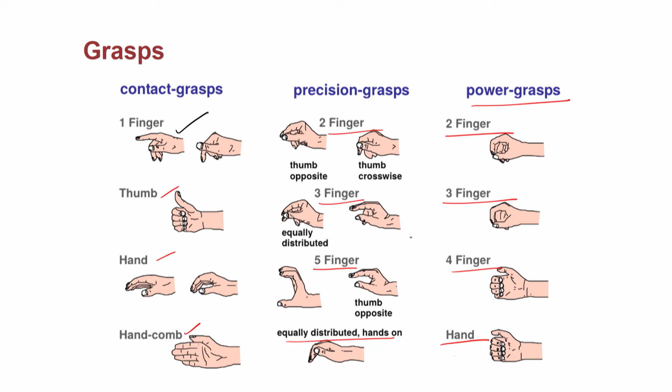Now, how are we going to enable this in machine haptics is what we are going to see. It is a very complex task, and the research started about 1960s. It is a very 60 year old topic. How the research evolved is also what we are going to see in machine haptics.

The same thing we can convert into machine haptics, where the motions—suppose the human finger is attached to the end effector of a robotic device—this robotic device movement can be sensed by movement sensors, giving position information to the computer. The computer can generate torque, and then actuators can apply force to the end effector, which will resist the movement of the user. That is how we can feel the forces.

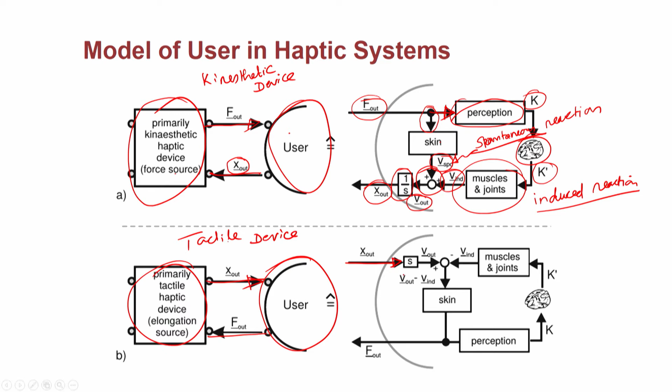So in this case, how are we going to model the user? Again, the position output is coming from the tactile device, and this is converted into V out, velocity out, using differentiation, and that is sensed by the skin, and the user is perceiving.

The user has a perception of the tactile device, and this perception is converted into a reaction, again an induced, voluntary reaction, which moves the fingertip. That fingertip movement is summed up, and the resultant velocity is given to the skin, which the user actually perceives. This perception is again part of the whole cycle.

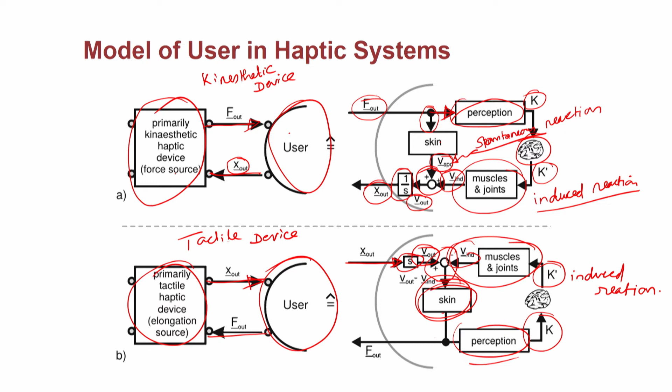So that is a tactile device, a model of user. What we will be focusing on is only the kinesthetic device.

Now this model of the user, we can consider that all those abstracts can be converted into a transfer function looking from the system's point of view. We can make it a transfer function of each of the small blocks, and if we can find these transfer functions, we can have much better control of the devices. That is one of the important stages of machine haptics that is also involved in human haptics.

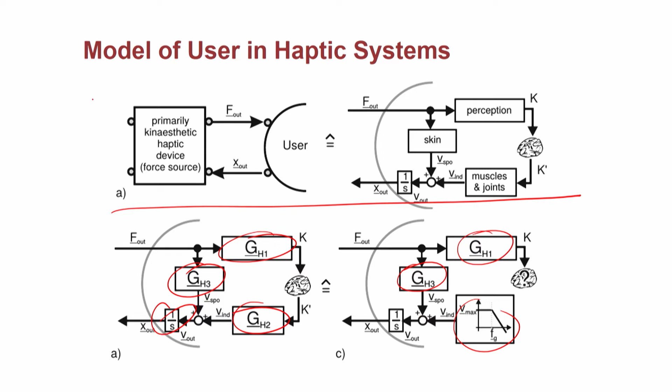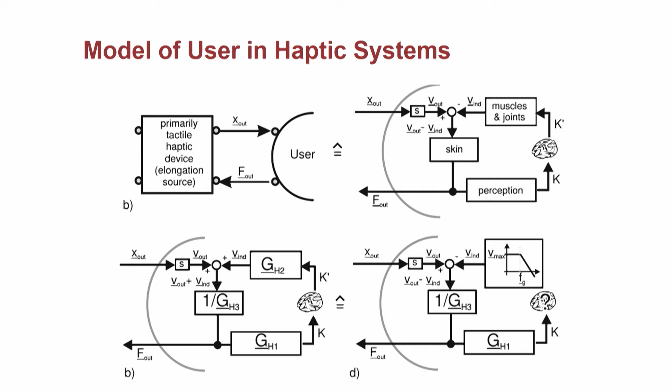How are we going to evaluate each of these transfer functions? That is still an active research area, and people are still struggling to find out how to determine the transfer functions of each of the blocks. This is for the kinesthetic system, and the next slide is for tactile systems. We will see details in coming classes, but I hope you see how we are approaching machine haptics.

Now we have an idea about how we want to go about it, but one of the major important challenges in machine haptics is the actuator. Any mechanical device will have its own intrinsic properties, it will have friction, mass, compliance, viscosity. But what we are looking for is a device, an actuator without friction, without mass, one which can deliver a very high range of compliances or very low amounts of viscosity. These are all ideal conditions, and only with ideal conditions can we design a better haptic device.

Visual interfaces exploit the limitations of the visual apparatus. You are watching this display flickering at 30 hertz. Those watching the video, it may be flickering at 60 hertz, and that 60 hertz is decided by exploiting the limitations of the visual apparatus. Similarly, can we find out what is the limitation of our haptic systems, which we can also exploit in the design of haptic systems?

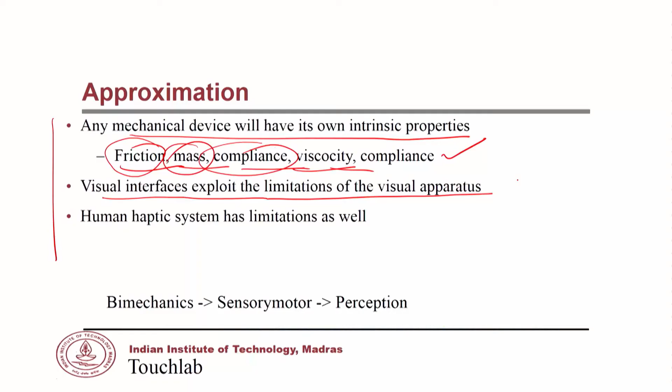In human haptics we studied that we need at least 1000 hertz in order to make the user not feel the vibration. That could be equivalent to 30 hertz in visual systems, whereas in haptic systems we talk about the 1000 hertz update rate. Human haptic systems also have limitations, and one of those limitations is that until 1000 hertz we will still be feeling the vibrations, just like in visual systems.

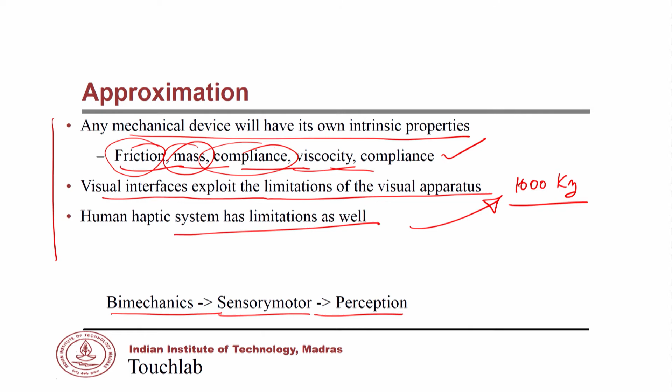So we need to understand the biomechanics and sensory motor systems leading to perception. That is what we have done in human haptic systems, and we will use a lot of those numbers from human haptic systems.

It was a lady, Beth Marcus. She is an alumnus of MIT. She started this company, a very small company, made this force feedback joystick, and then sold it to Microsoft for a huge amount of money. This was before the dot-com bubble came. She made a lot of money, and then started more companies, invested in a lot of dot-com companies, and finally she lost almost all the money back.

I had a chance to work on this first force feedback joystick when Microsoft was sued by another company over the patent for this first force feedback joystick. We had to make some demonstrations to build the legal case and produce it in court to win the case. That was one of the first force feedback joysticks.

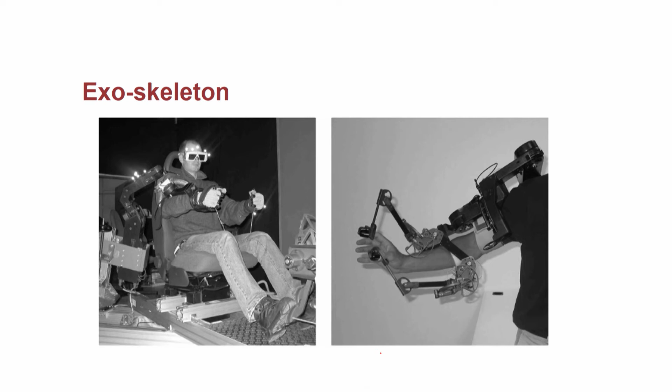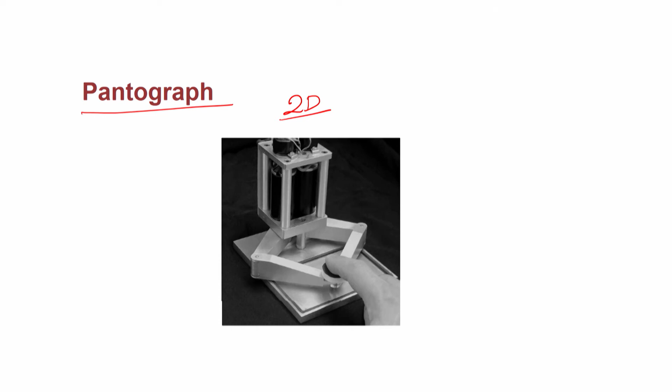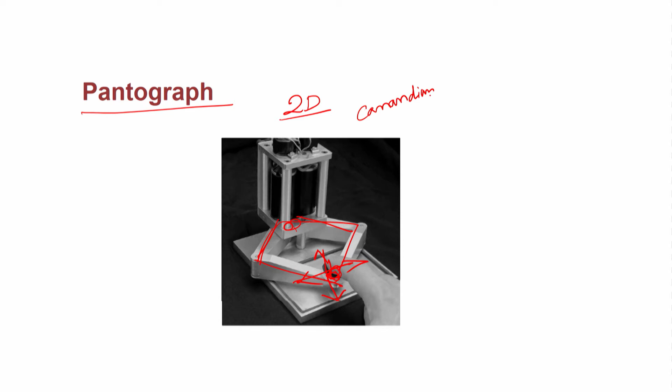One of the earlier 2D haptic devices is called the pantograph. This pantograph has a parallel architecture. The user holds it and moves in 2 dimensions, and there are 2 actuators, one for one arm and another for the other arm, controlling the position in the x and y axis. This is from a well-known Canadian academic institute, called the pantograph. We are going to see it in detail.

While driving, essentially in Europe, if you look at it, the roads are very fine. You can drive the car at 200 kilometers per hour or whatever it is. So when you are traveling at 200 or 300 kilometers per hour, a very small mistake, if you take your eyes off the road, you are in great danger. So we need a lot of interfaces to help the user or driver manipulate objects in the car without taking their eyes off the road. There are AC switches, fan and radio controls, so many controls in the dashboard, but the user has to access them without taking their eyes off the road.

One way is using this iDrive. You just reach it and navigate all the controls in the dashboard using only one point of contact. It has 1 degree of freedom. Using this simple haptic feedback, you can control many things. Even though it was considered a major technology, BMW had this device in most of their cars. In the latest edition of the BMW, this is not there. So it may be a good exercise for you to find out why BMW did not include the iDrive in the latest cars. I would like you to think about it.

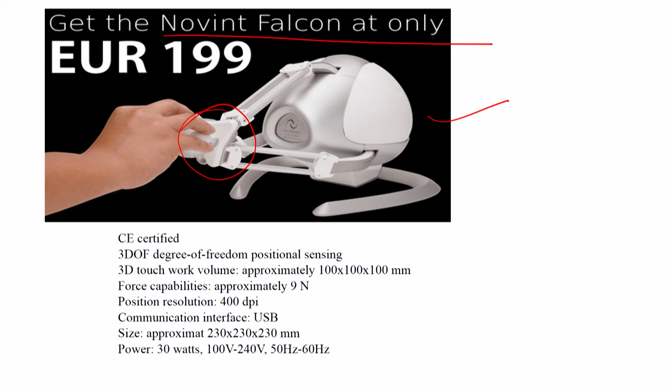One of the cheapest devices in the market is called the Novint Falcon. Again, one of the inventors of this Novint Falcon is from MIT. It costs just $200 or 200 euros. As of now its resolution is very poor, the force feedback also is very poor, and the workspace also is very poor, it's a very small workspace. And again it's a trade-off between position sensing as well as force feedback, both things.

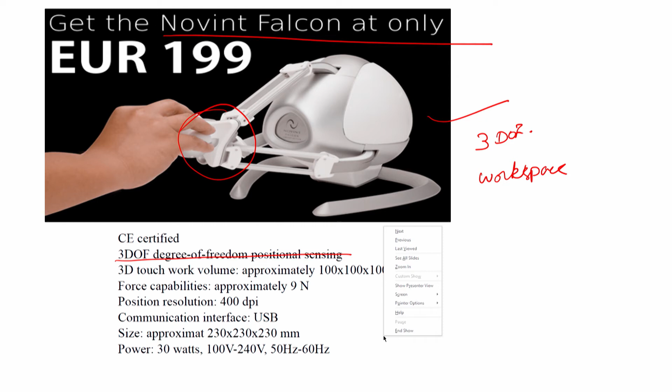Again, we are going to see how to make a very simple haptic device as part of this course. So recently there are new players apart from the SensAble Phantom, they are called Force Dimension, which can give you more forces, and there are 3-DOF versions and 6-DOF versions, and again we are going to see different architectures of haptic devices.

These are all parallel architectures, whereas the Phantom which you have seen earlier is a serial architecture. We are going to see what different kinematic chains are used to develop haptic devices. Most of these devices, any haptic devices, can be considered as advanced robotic devices. We are also going to see what is the difference between a robotic device and a haptic device. Students who understand robotic device concepts will find a lot of commonality between haptic device design and robotic devices, and you will find what more is needed in order to design a haptic device. It is much more challenging than just developing a robotic device.

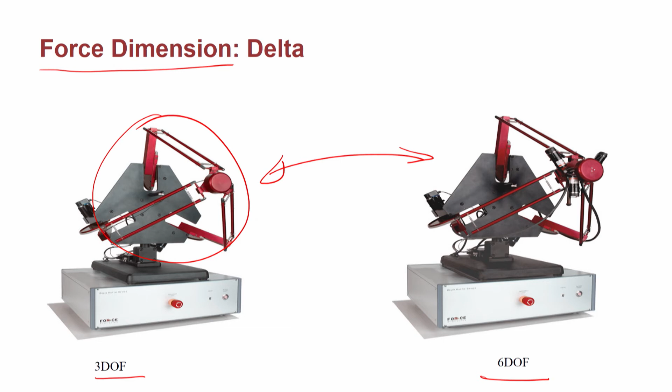These are the specifications of the Delta 3-DOF. The maximum force it can give you is 20 Newton, which is about 2 kg. If you can hold a 2 kg weight, that much force it can give you in each of those degrees of freedom.

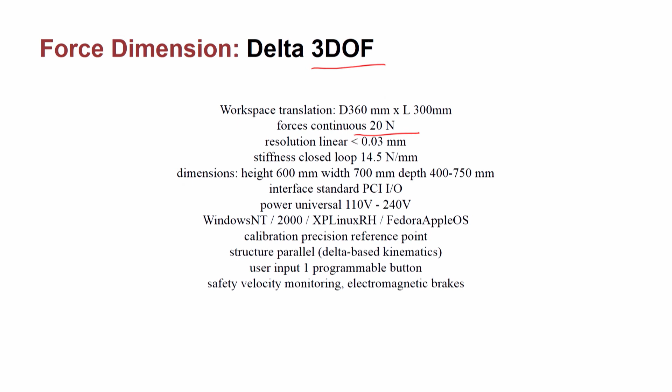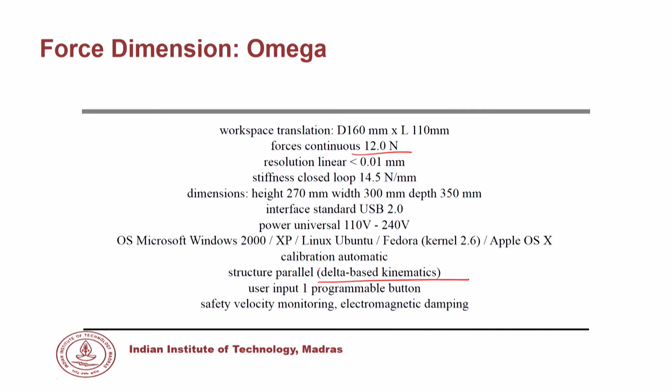They have a recent version of Omega, and the difference is it has 6 degrees of freedom, with 12 Newton, which is much lesser, and it uses delta-based kinematics. Those of you who are robotics students will understand it is a parallel, specifically delta structure, kinematic structure.

We are going to see different types of haptic devices. One device is called the haptic master, which is very well known. It is very distinct, different from all the existing haptic devices. It is an isometric device, also called an admittance device.

When we talk about the different control systems necessary for haptic devices, we use either impedance devices or admittance devices. Most of the haptic devices available in the market use impedance control, whereas the haptic master uses admittance control. We are going to see isometric, impedance, as well as admittance devices in the coming classes.

The workspace requirement is as dictated by the laparoscopic surgeons; whatever they wanted has been incorporated here. If such a device has to be bought or imported from other countries, it costs about 2 crore, whereas at IIT Madras the whole device has been fabricated within the campus and costs much less than 5 lakhs.

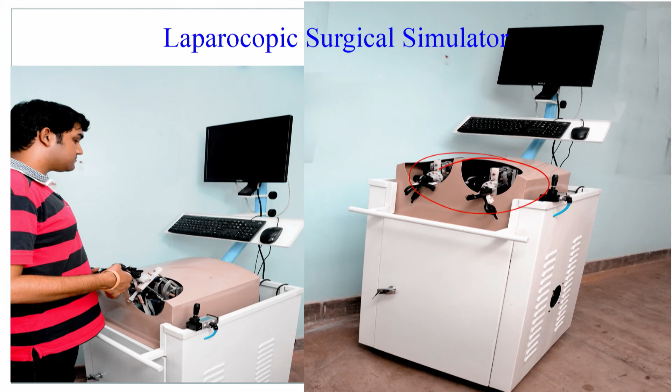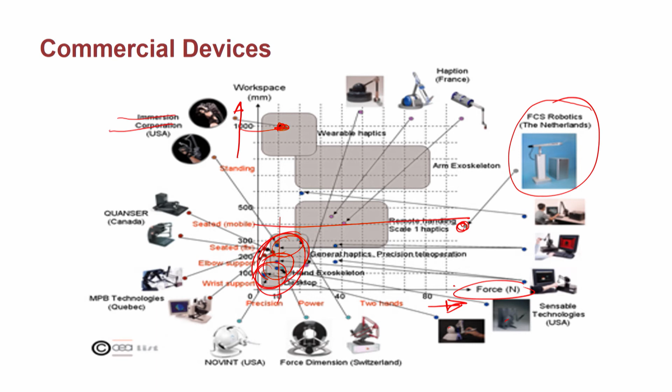This is an admittance type device. If you look at it, this is the Immersion Corporation. The force range is very less, but it can have a very large workspace. Depending upon the range of the workspace and the force it can generate, the cost also varies.

These are all commercial devices, but there are devices available only in the laboratory still. Again, x-axis force versus workspace: there are exoskeletons which can have a large amount of force as well as workspace.

For example, this device is again like an exoskeleton, but the force it can generate is very less, and its workspace can be very high.

Again, the problems with exoskeletons: all these devices can be divided into two categories, grounded or ungrounded. If you look at these devices, they are grounded, staying on the ground, so any force generated has to be compensated by a reaction force transmitted to the ground. Whereas the forces generated in an exoskeleton are ungrounded; in fact it is called bodily grounded, so the generated force has to be compensated by the reaction force on your skin. So these are the challenges.

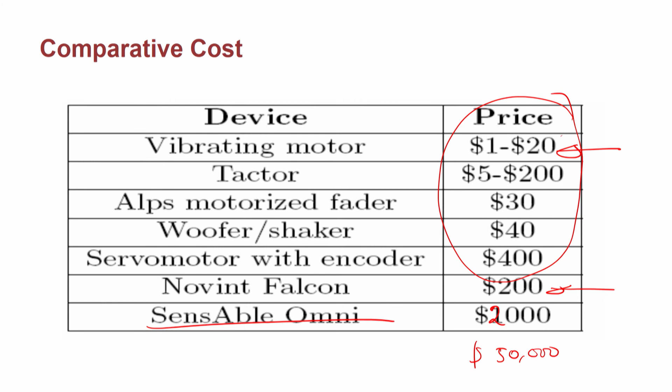Now in Falcon, as I told you, it is $200. Other vibrotactile devices can be much more simple. A simple vibrotactile device can be even $1, but it can develop only the vibrotactile feedback, not the haptic feedback.

So in all these things, as I told you, the actuator is a major issue. We are still searching for the ideal actuator. If you ask me, one important challenge in a haptic device is finding the right actuator, the ideal actuator. We are still to invent an ideal actuator for haptic devices.

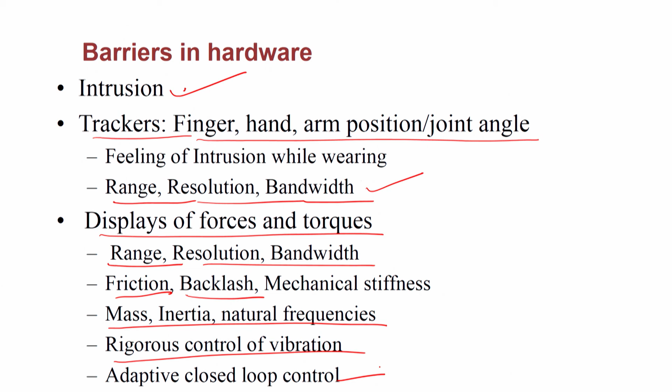Again, as we said, mass has to be 0, the inertia has to be 0, that is not possible. How are we going to overcome all these challenges? Rigorous control of the vibration and then adaptive control, these are the challenges. So each of these challenges we are going to see in later classes.

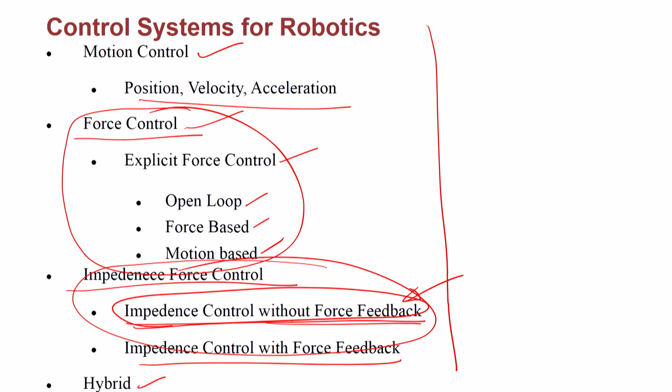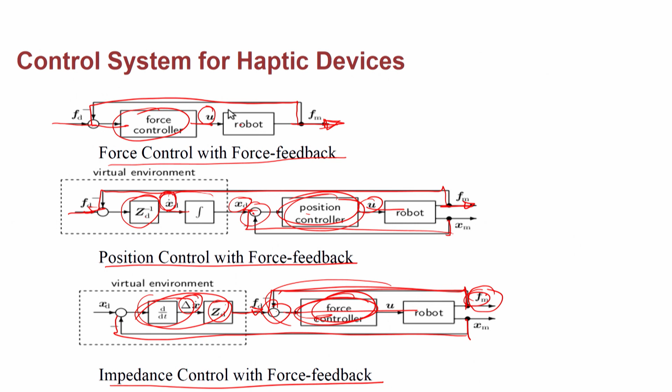So without force control, position alone can be used to control the impedance, and that solves the problem. There will not be a force controller or force measurement, but there will be position feedback, and then the impedance controller. That is what devices like the Sensable Phantoms have been using. We will look at different other control systems in the coming classes.

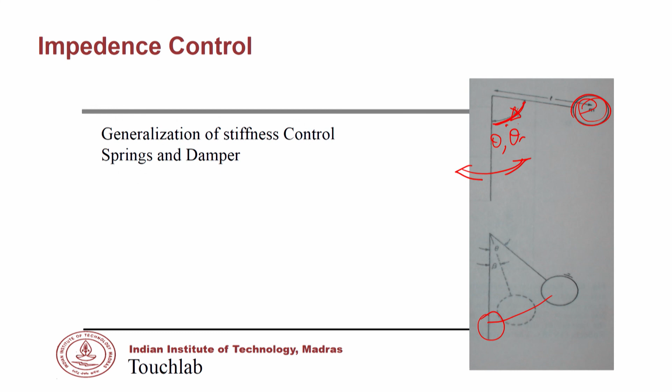As I mentioned, in the human haptics class we needed not only the angle—for example, this is a hypothetical pendulum. If we control the position of the pendulum with angle control alone, it will swing back and forth. If we control the pendulum not only with the angle but also theta dot, then we can control it and make it not swing beyond this position. That is the reason we needed impedance control. Impedance control is the generalization of stiffness control, which we have seen in earlier classes.

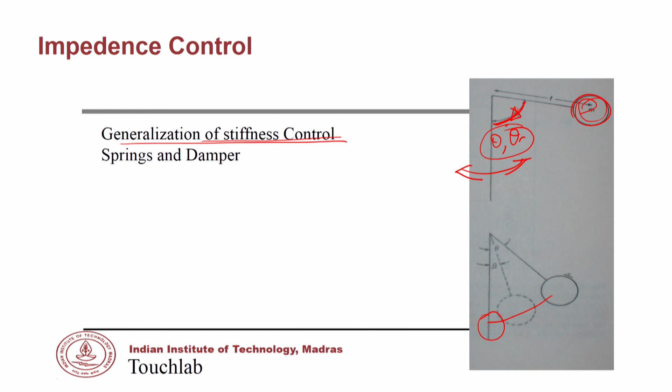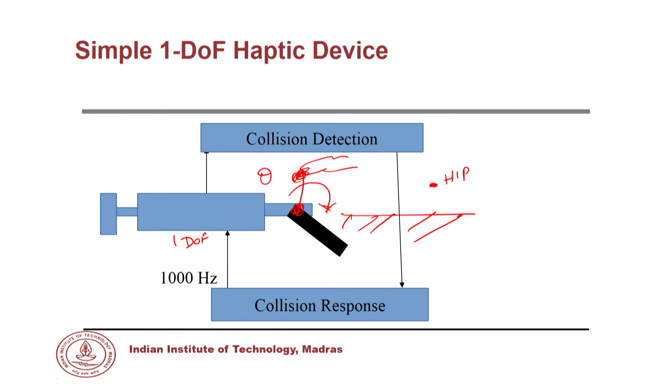So this haptic interface point, we can check whether it is colliding with a virtual wall at every frame. If it is not colliding, we do not have to generate a force feedback. If it is colliding, suppose at some time it has come in there, then we need to find out how much force it has to generate—for example, how much torque this motor has to generate in a 1 degree of freedom system.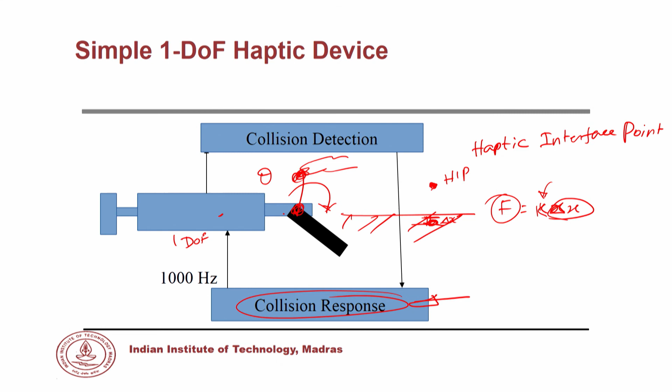So we will have different models of force response. For example, the simplest depends upon the depth of penetration: F is equal to Kx, the simplest model, K into delta x. We know delta x, and assuming the virtual wall has some stiffness, we can find the force, and then convert force into torque, and ask the motor to generate that torque. This is the simplest 1 degree of freedom haptic device.

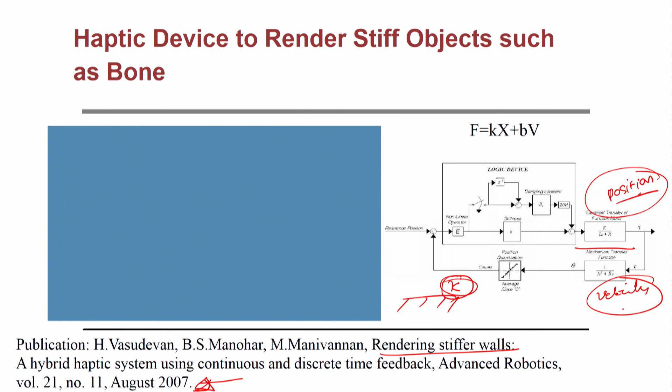We developed a 1 degree of freedom haptic device in our lab, but having two different loops: one controlling the position, measuring the position, and another measuring the velocity. In order to render stiffer virtual walls, there is a maximum limit on the stiffness achievable for stability. In our earlier work we measured position as well as velocity and increased the maximum stiffness of a virtual wall that can be rendered by the same haptic device. This was one of our earlier works in 2007. The student who worked on this is right now working at Apple designing haptic devices.

All these devices are for rendering a rigid object, but we can also have deformable objects rendered. We will see the details of deformable object rendering in a later class.